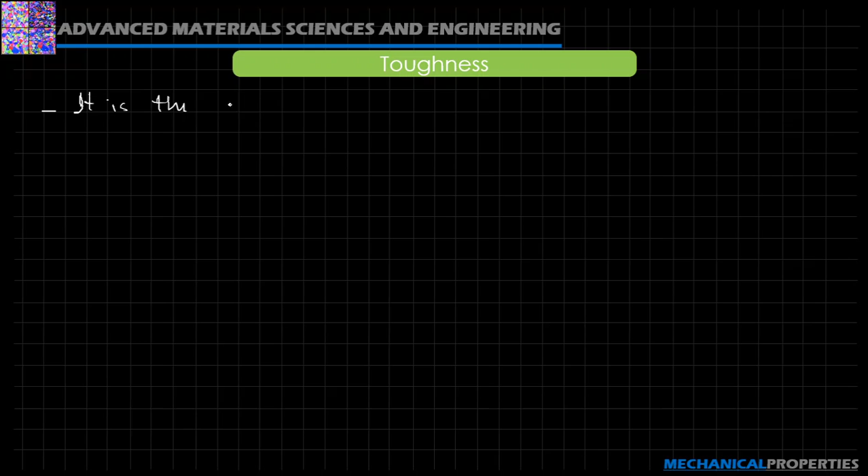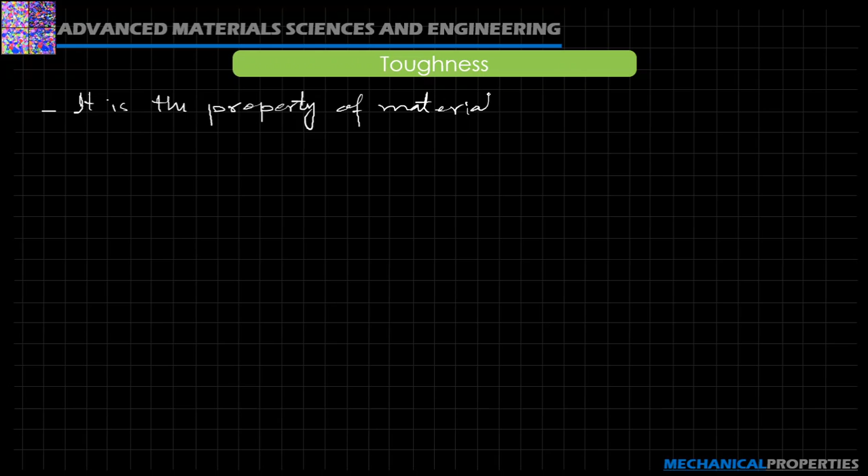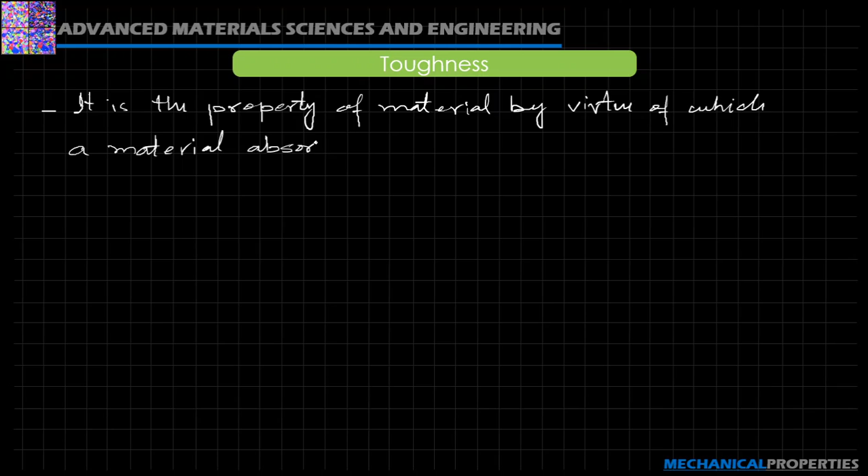Toughness is the property of material defined as the property by virtue of which a material absorbs maximum amount of energy before fracture. So this is the property of material which is measured under action of energy instead of application of mechanical force. We don't apply mechanical force to calculate toughness, rather we apply energy.

Here energy is basically in the form of kinetic energy, meaning if the material absorbs more energy before the fracture, its toughness will be more.

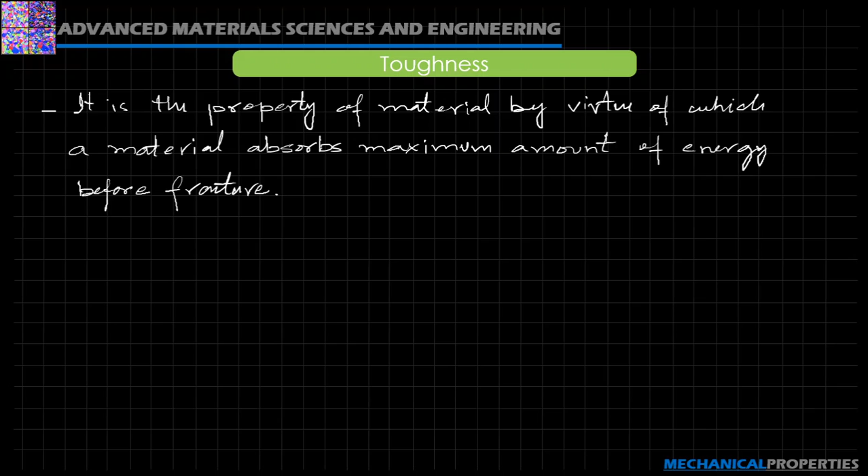Let's say we take two identical plates, one made of glass and the other made of wood, and if we throw a stone on both plates with the same force and velocity, meaning the same kinetic energy, that is kinetic energy half mv square, once we throw the stone with the same kinetic energy, we observe that the glass breaks but wood does not break.

This is because wood has more toughness than glass. In other words, wood can absorb more energy and glass cannot absorb more energy. So we can say the toughness of glass is less than the toughness of wood.

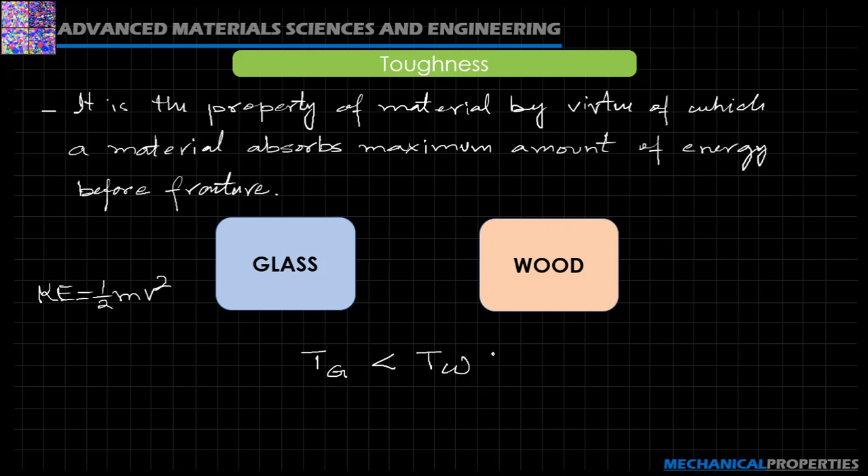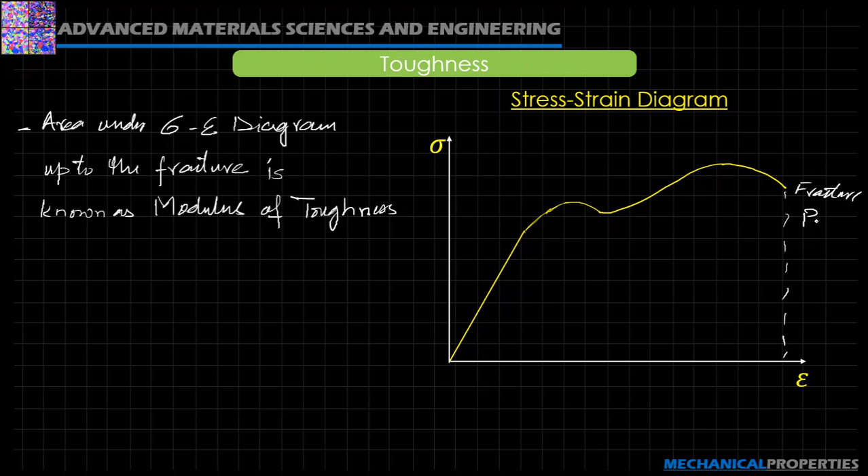This is the fracture point. So area under the curve up to the fracture is the modulus of toughness of that very material, and we know that modulus of toughness is itself the measure of toughness, meaning more area under the curve, the more modulus of toughness of the material.

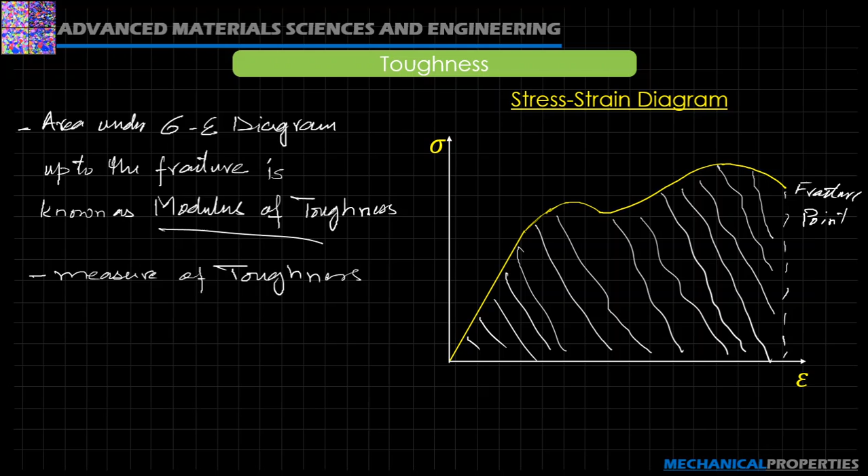Now talking about resilience and proof resilience, these properties are also measured under application of energy like toughness instead of using mechanical force.

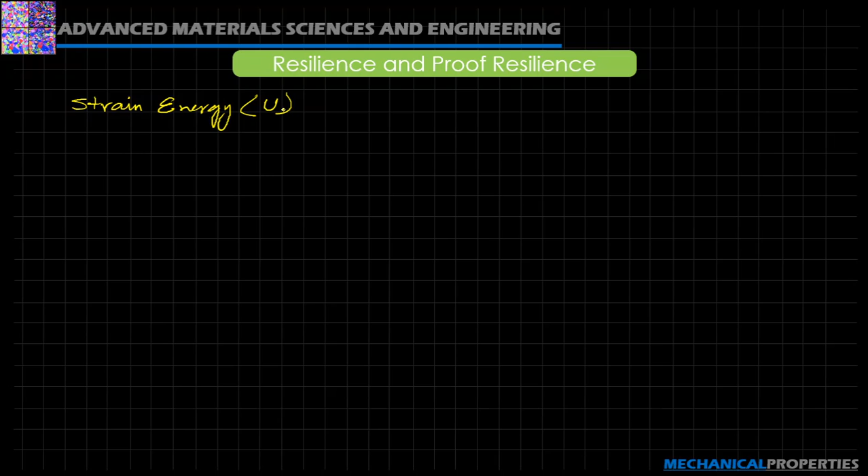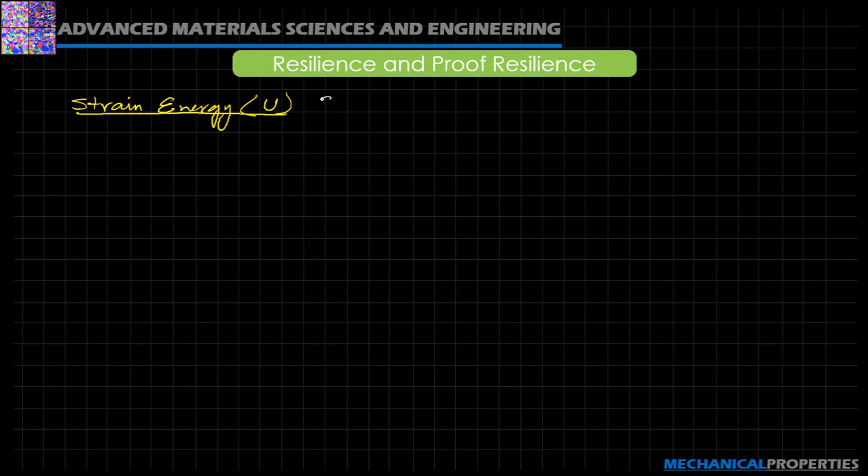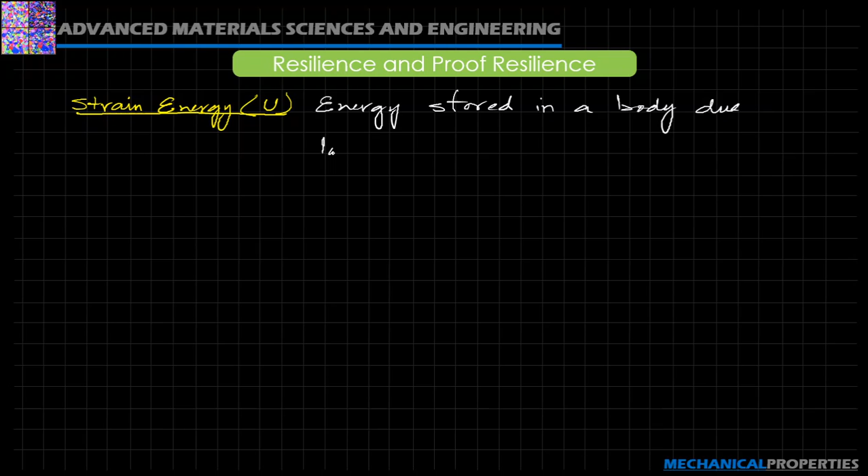But before that, it is important to understand strain energy, represented by capital U. It is the energy stored in a body due to the deformation.

If we compress a spring, for example, due to this compression the spring will hold some energy, and the spring can push any object by again using this energy.

Let us now discuss how strain energy comes into any object or body. Once any material is deformed, meaning to cause the deformation some force is applied, we can say the force has done some work on the material in the form of deformation of the object. That same work is in fact stored in the form of energy in that very body. That energy is known as strain energy.

Thus, strain energy is in fact the work done for deformation.

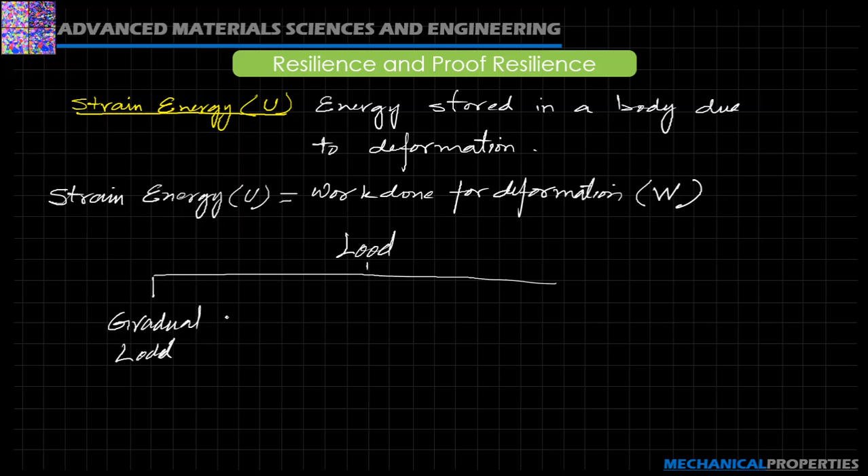Here it is important to know how load is applied, meaning the type or category of load. If we discuss the types of loads, there are basically three main types. One is gradual load, in which the magnitude of the load is gradually increased from 0 to the maximum.

Then we have a sudden load, where the intended load is applied at once on the component. And then we have the impact load.

Once the load is dropped from some height on the component, the component and load will collide and a shock will produce. This type of load is known as the impact load.

There are three main types of loads. Mainly the gradual load is used in our studies, like in the universal testing machine, the UTM, where the load value is gradually increased. Now we will study the strain energy under application of gradual load.

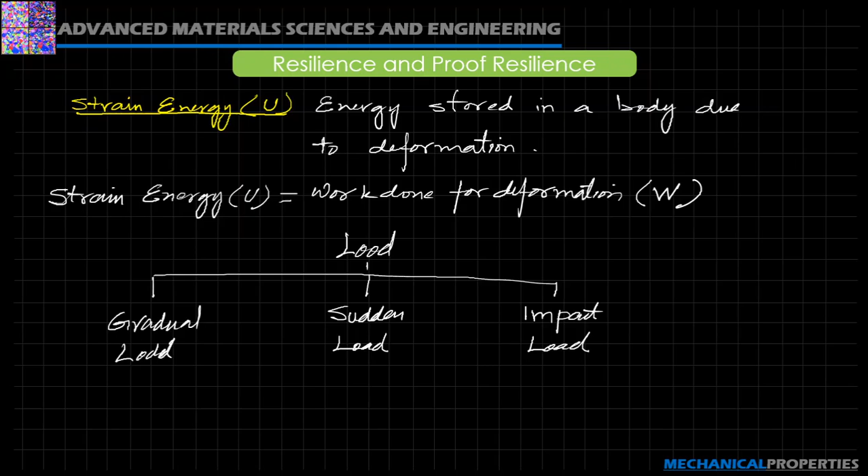Let's draw the load versus deformation diagram. If the material under consideration follows Hooke's law, then the behavior of load deformation will be linear, as we are seeing in this deformation load diagram. This is the linear portion, and when we increase the load gradually, accordingly the deformation is also increased.

A point will come where the linear behavior will stop. Let's say this point is A. Till that point there is a linear behavior between load and deformation, and this is known as the elastic limit. The material will give elastic behavior till point A, and after that there will be plastic behavior.

If we calculate the area under the curve, of this triangle, that is going to be half load into deformation.

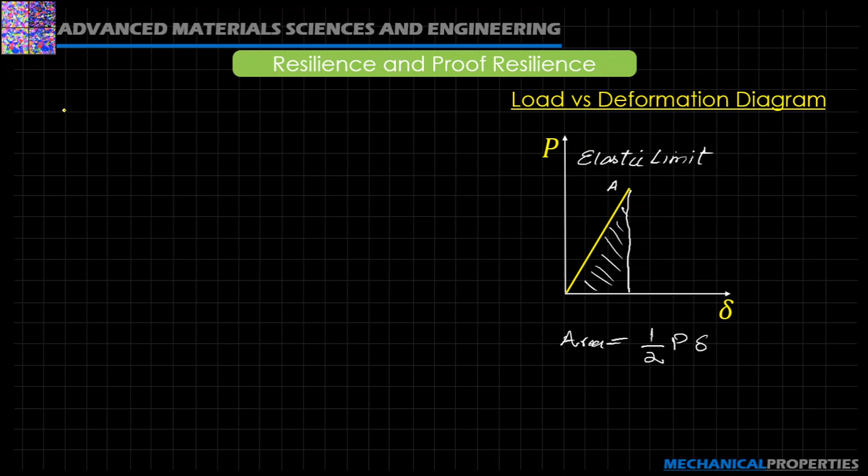Now coming back to resilience and proof resilience. We define resilience as the amount of energy or strain energy within the elastic limit, till any point till the elastic limit.

Strain energy or the energy absorbed by the component within the elastic limit, that would be the resilience. Now what is the proof resilience?

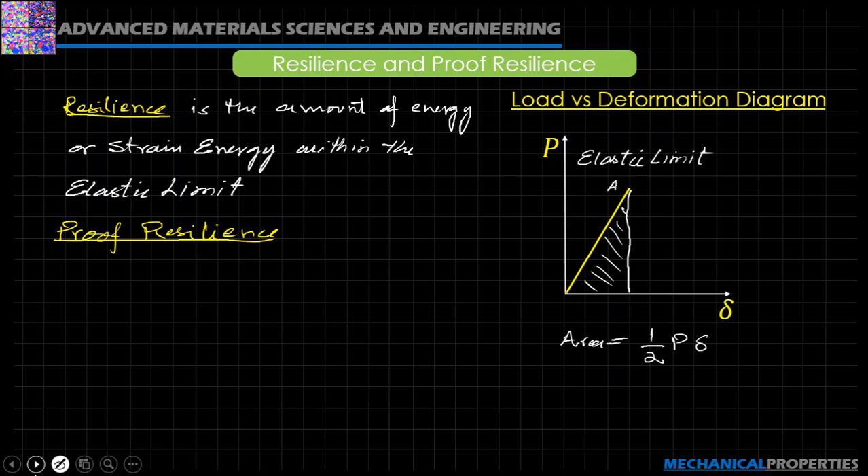This is defined as the amount of energy or strain energy absorbed up to the elastic limit.

The proof resilience is the area under the load versus deformation diagram up to the elastic limit, till this point. Now this total is the proof resilience, whereas the resilience is the amount of energy within the elastic limit.

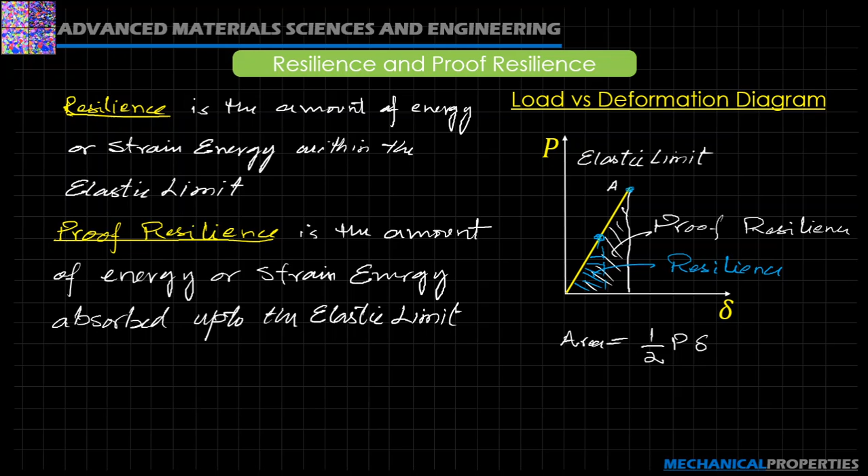Now if we consider this using the stress strain diagram, the strain energy per unit volume under the case of considering the stress strain diagram, the strain energy per unit volume is known as the energy density.

And if we calculate the strain energy up to the elastic limit, or we calculate the area under the stress strain diagram, it represents the modulus of resilience.

So generally we can say the strain energy per unit area is known as the energy density.

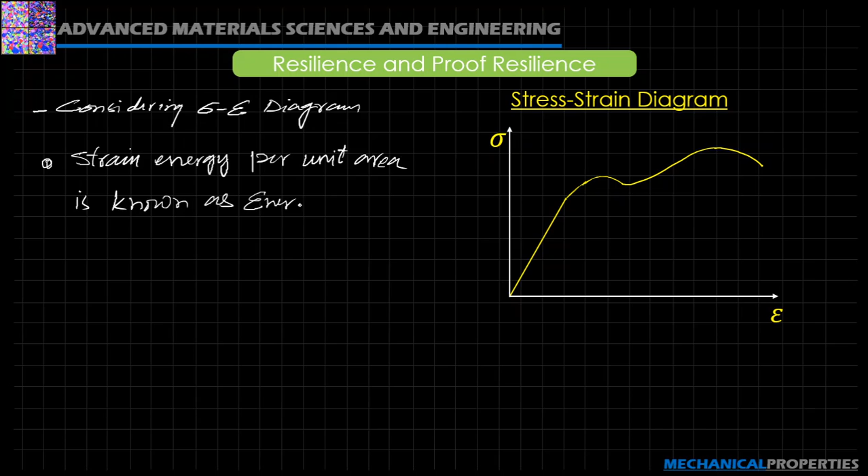And if we calculate the strain energy up to the elastic limit, let's say this point shows the elastic limit, so this is the modulus of resilience.

And this we can calculate as the area under the stress strain diagram up to the elastic limit.

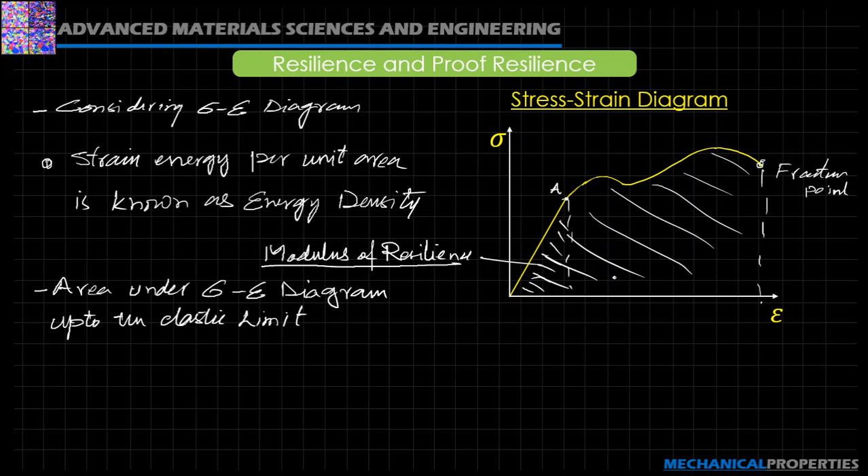That is the modulus of resilience. And the area under the stress strain diagram up to the fracture point, up till here, this total area is the modulus of toughness.

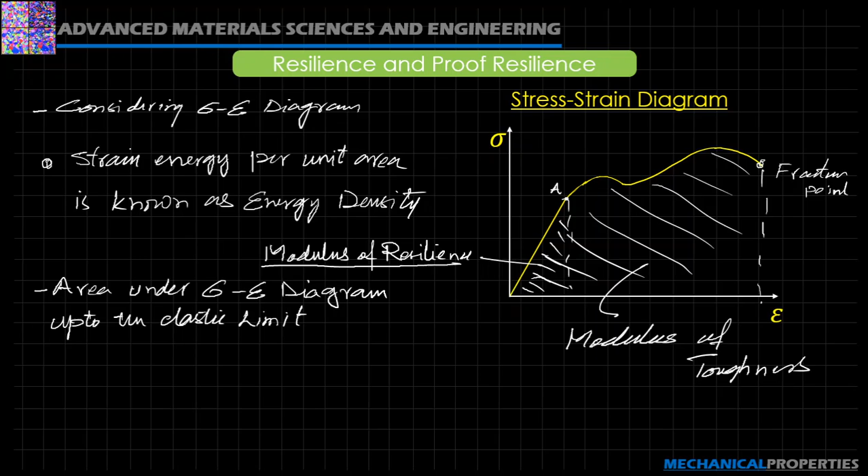Now resilience or proof resilience is a very important property for springs. Further important points are that toughness, resilience, and proof resilience deal with the energies of materials instead of mechanical force.

The amount of energy within the elastic limit, as we discussed, that is the resilience, and the amount of energy absorbed up to the elastic limit is the proof resilience.

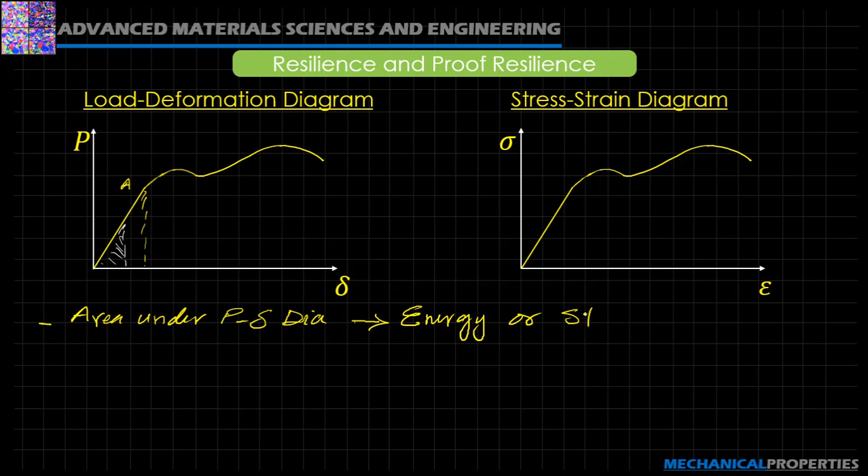Further, we can describe here the area under the load deformation diagram represents the energy or strain energy.

And area under the stress strain diagram represents the energy density.

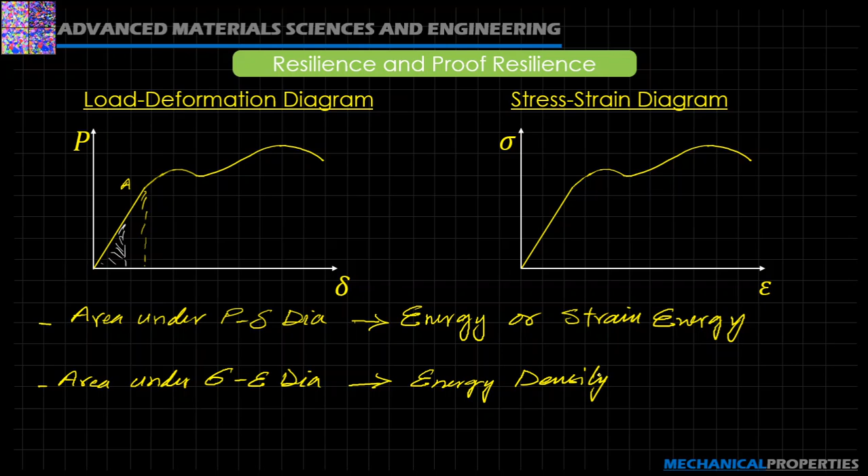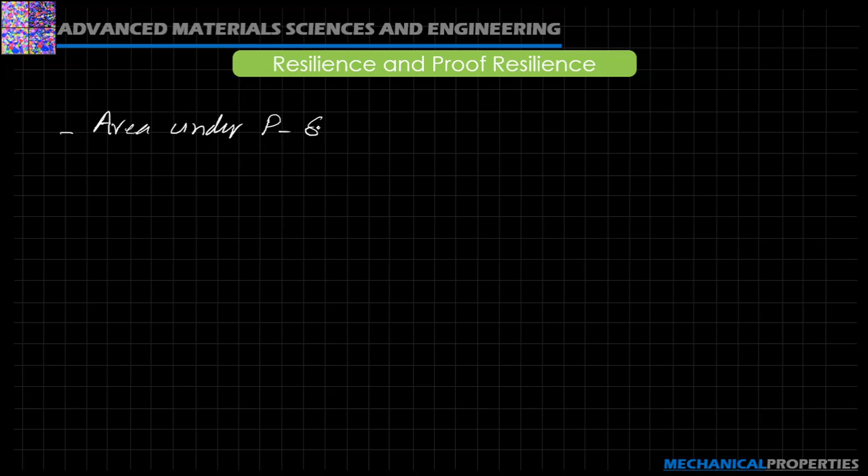And area under the load deformation diagram up to the fracture point is known as toughness.

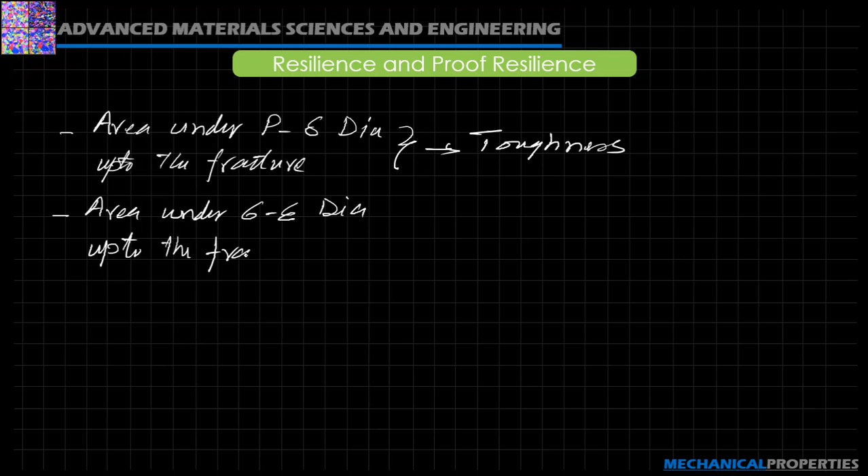And area under the stress strain diagram up to the fracture point is known as the modulus of toughness.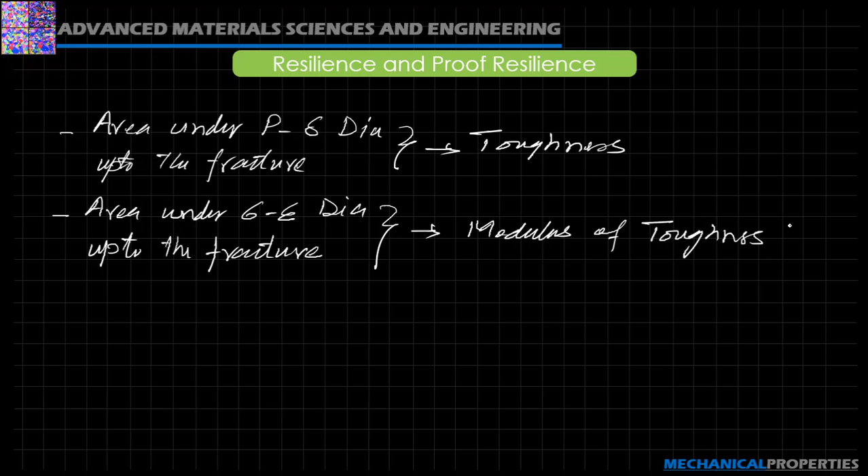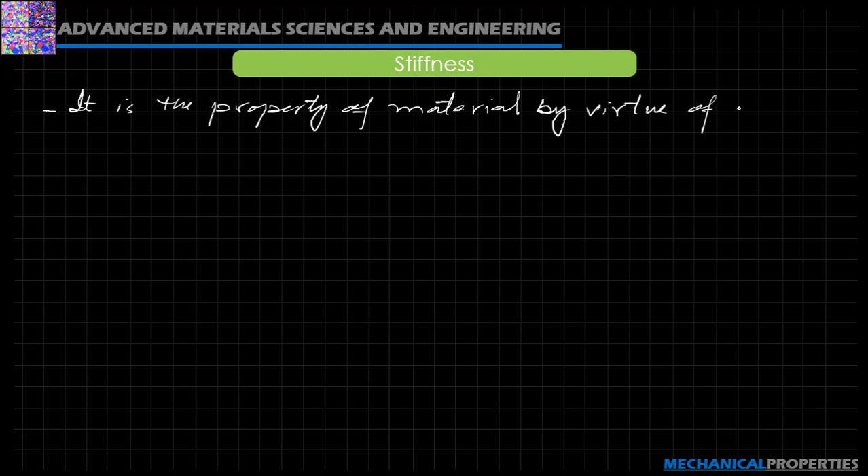Now let's discuss stiffness. It is the property of material. Stiffness is the property of material by virtue of which a material resists deformation.

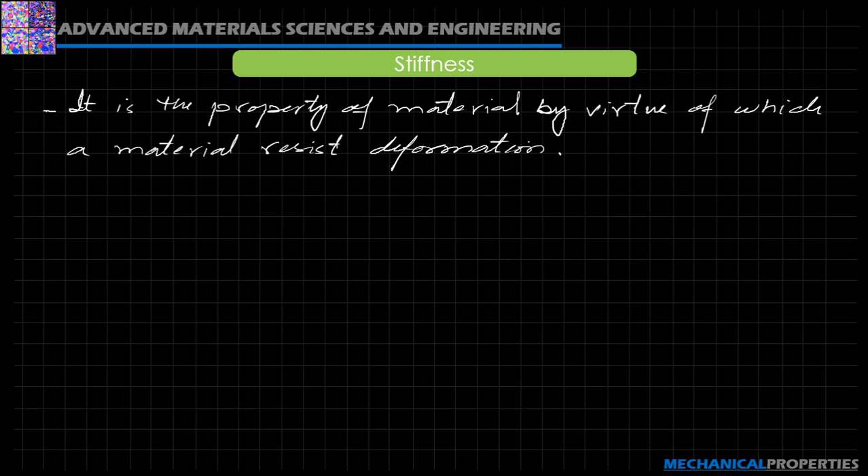A more stiff material would be more difficult to deform, or we can say that if the material is easily deformed, the material is less stiff. So stiffness can also be defined as the load per unit deformation.

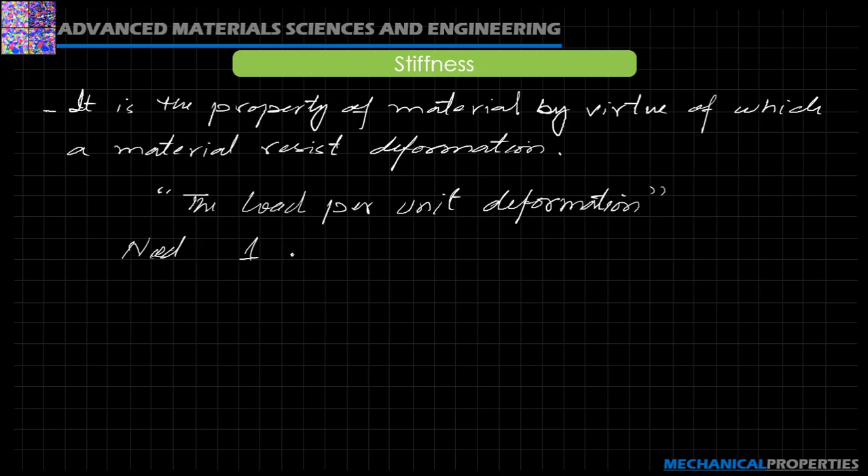The load per unit deformation. Let's say if we require 1 millimeter of deformation, and we have components of two different materials of the same dimensions.

Let's say we have a component of material A and a component of same dimensions of material B. To achieve 1 millimeter of deformation of component A we require 100 kilonewton of load, and to achieve 1 millimeter deformation for component B we require 200 kilonewton of load.

So we can say component B requires more load for the deformation up to 1 millimeter. So it means the stiffness of component B is greater than the stiffness of component A. It indicates that component B will resist deformation more.

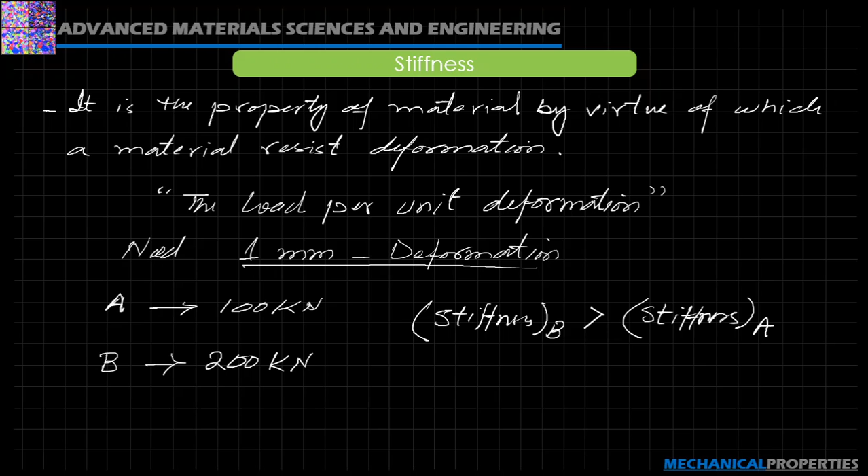Now with this we end our discussion here.